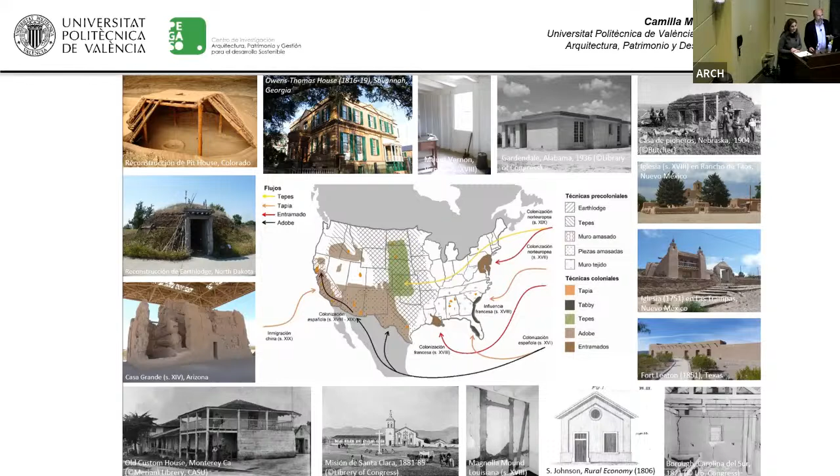But also we have been studying earthen architecture in the States. Some say, is there any earthen architecture in the States? Yes, there is, and there's a lot, with a big variety, so interesting and so rich. As you're curious looking at that, don't worry, we have two articles already written on earthen architecture, and we will share them with you about the techniques and the preservation work on earthen architecture in this country.

Earthen architecture is, that way, a local heritage, but it's also a global heritage because you can find it everywhere, literally. And it's a wealth of architecture with different techniques - the same material, but used in different shapes, different types of techniques, depending on the conditions, the weather, on many factors.

In fact, recently there has been an initiative to see the inventory of earthen architecture in the UNESCO World Heritage List - how many of these sites belong to the category of earthen architecture. It was discovered that 150 sites, let's say 20% of the UNESCO World Heritage sites of cultural or mixed sites, are made with earth. So let's go to the second chapter, earth and construction.

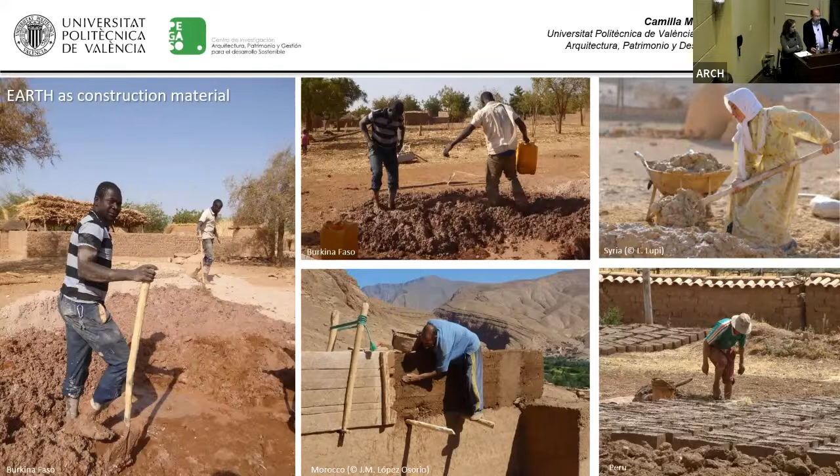Earth as a construction material is a wonderful material because it's shapeable. You can use it many ways. These are photos made last year.

So another thing to say about earthen architecture is that it is still alive in many places of the world. Even in the States, we have seen people working with adobe or with rammed earth. Still there.

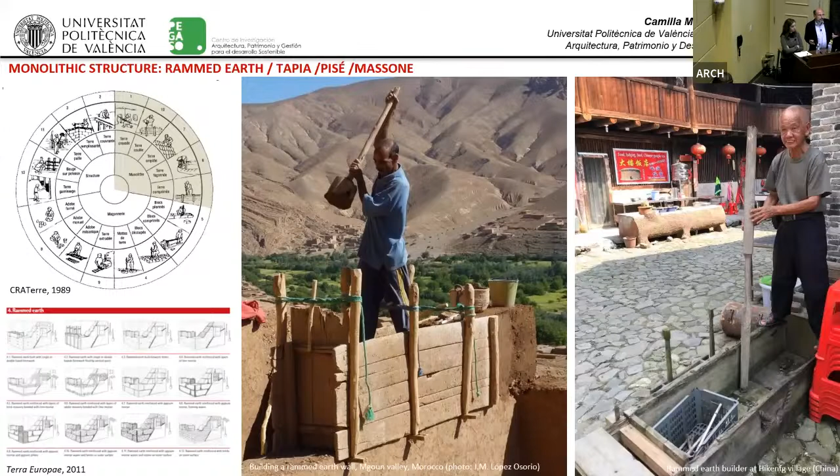If we speak about techniques, there are three big families. One would be the monolithic structure - that would be rammed earth, which we call in Spanish tapia, or pisé in French, or massone in Italy. You can see here two builders, one from Morocco, one from China, in a very similar way with a very similar formwork, because this is some kind of international heritage. This type of formwork goes back thousands of years and is still being used in some places.

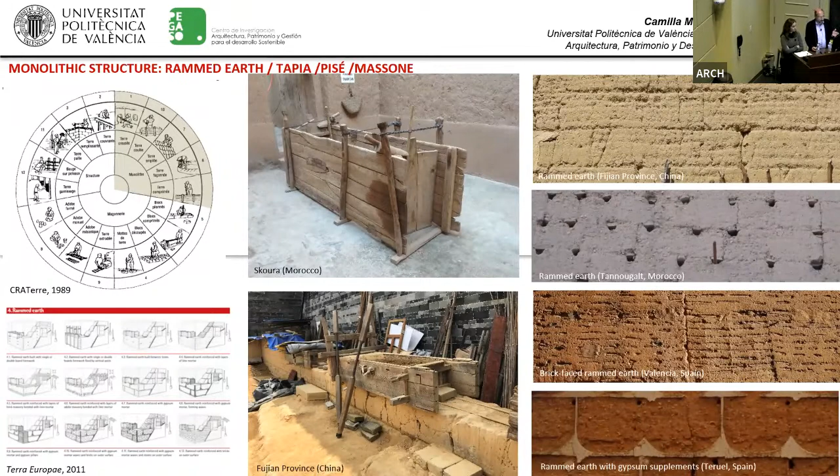You can see some variants with earth - only with earth, enriching with lime, or combined with bricks, with gypsum. There's another type of monolithic structure in this family: the cob, also called pared de mano, bauge, or terra e paglia, which we can find all over the world.

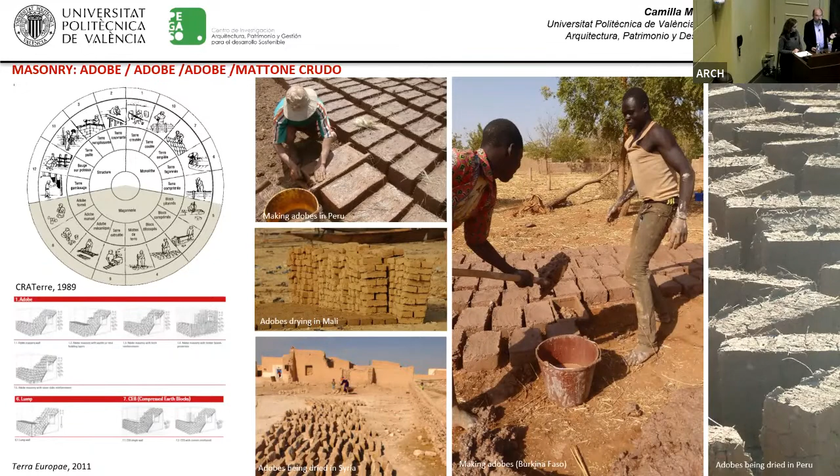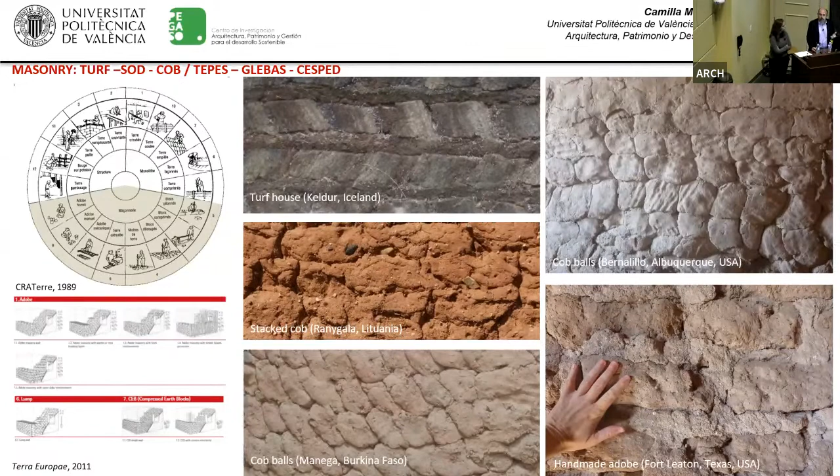Then the second family would be the earthen masonry. For example, the adobe would be the most famous or well-known, but also turf, or what you call here sod, or stacked cob balls, handmade adobe - many possibilities depending on the place and the possibilities.

And the third big family, the mixed structure, would be the mixture between vegetal plant or branches or wood, timber, with earth - so it would be like the wattle and daub type or the half-timber type.

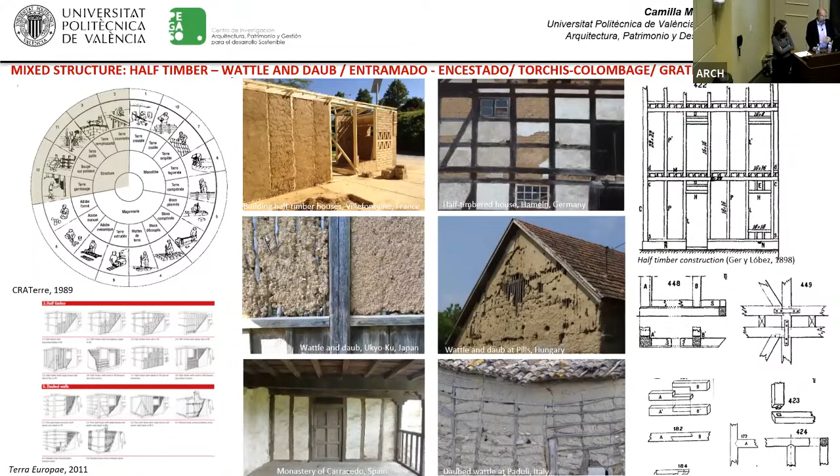So after seeing a little bit, I think we have to go further. Okay.

So after seeing what we are calling earthen architecture, now let's look at why it's important, or why it's still important, and which values we can still find in this type of architecture. If we go around the 3 pillars of sustainability - economic, environmental or natural environment, and social - we try to find which type of values we can find in earthen architecture related to these pillars.

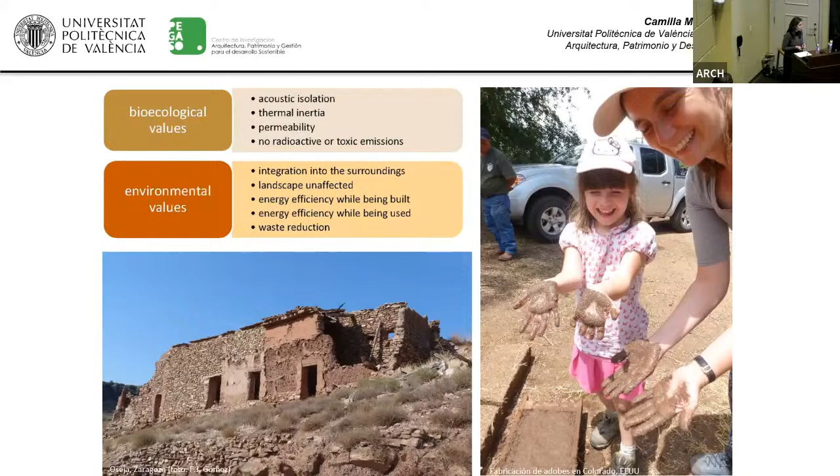From a social or sociocultural point of view, it's related to our culture, our place, our local history in many places and countries. It's a type of architecture that can really connect us with our culture, with our past, but also our present and future. It's something we can understand as an architecture that teaches us about sustainability, about our culture, about our history. From an intangible point of view, it's related to knowledge - the know-how.

It's related to craft people, people who know how to construct and build with these kinds of techniques. So if we still use this architecture, we really could contribute to the maintenance of this knowledge and these craft people. If we organize all the values we saw, we can arrange them around three pillars: sociocultural value, socioeconomic value, and environmental value.

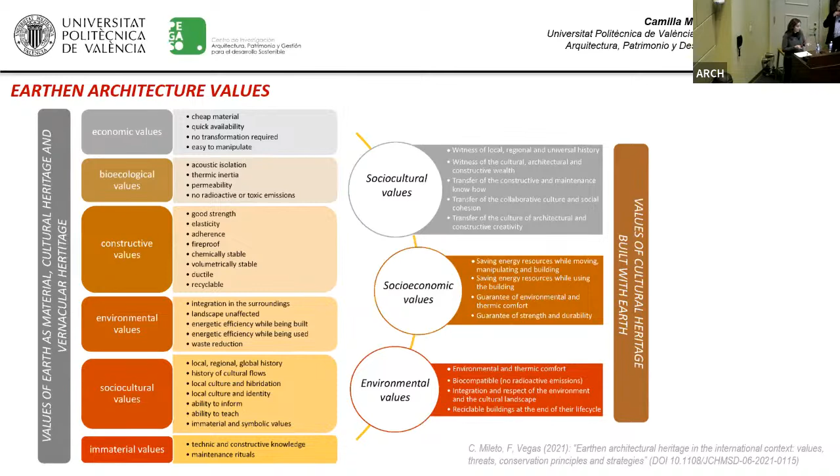So we can say it's still interesting in the world nowadays because we are trying to find sustainable architecture, and earthen architecture could give us an idea or a possibility to work on that. But of course, nobody is perfect - earthen architecture is at the same time weak in front of other things. For example, water, atmospheric agents, so all natural threats, as well as anthropic threats and social threats.

Earthen architecture is weak, we can say. It's weak in front of water, especially wind, and especially the combination of water, rainfall, and wind. So sometimes we have to restore it, to maintain it, and it needs maintenance that is not every 10 years. Maybe it needs maintenance every year, every 5 years. So we need to maintain this architecture.

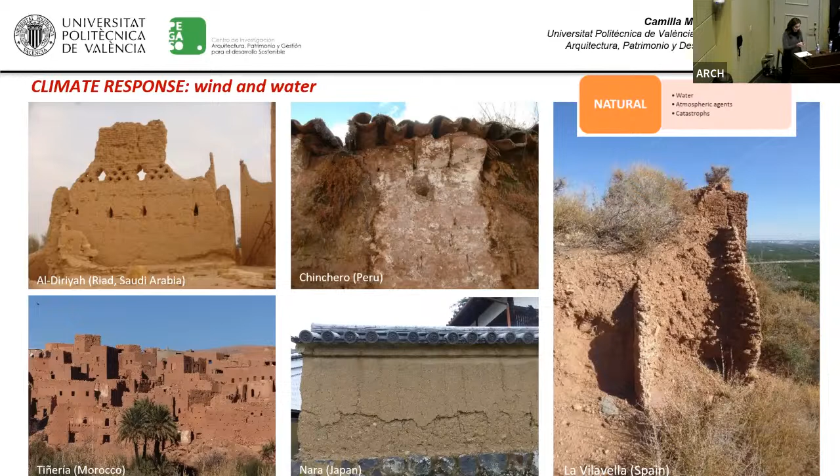During lunch we were speaking with some students about the weakness of earthen architecture in front of earthquakes. We saw in Morocco some time ago, about a month ago, it seemed that everything happened because the building was made with earth, but it's not. So it's weak, maybe, but it's not more weak than other architecture. The thing is that traditional architecture is something that remains from a long experience during history. So maybe what we have nowadays is the best that arrived to us. If we really look at this architecture, there are many devices to make it strong in front of earthquakes, for example, or other threats. So it's not everything because it's made of earth. This is not really the problem.

We can use it also in earthquake-prone areas, and it's possible to restore it, to recover it also in these places. Another point is floods and cyclones, especially floods. Of course, it's more or less a weak architecture in front of water. In the case of floods, the water remains for a time, so of course it's a problem for earthen architecture, but we can recover it, we can restore it, and we can organize with some devices in front of this type of situation.

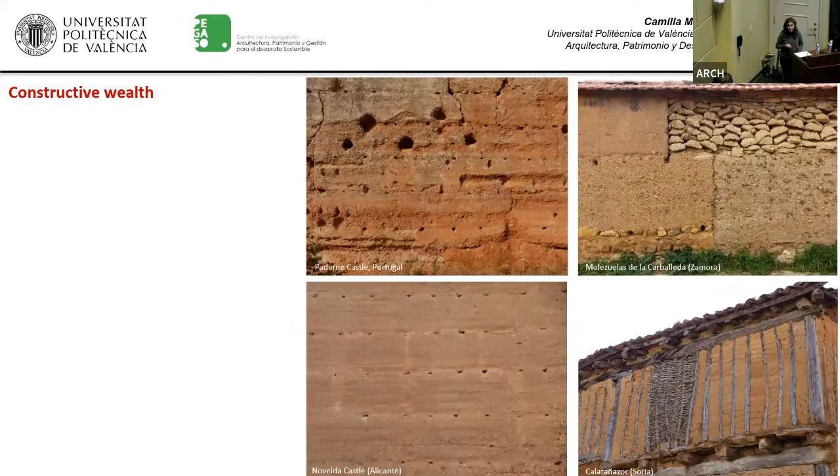We have a lot of different techniques. I don't know, we found like 70 or 80 different techniques that we can find around Spain, of course from the old period, from the Iberian period, so prehistoric times, through the Romans, through the Islamic period, till the 19th century.

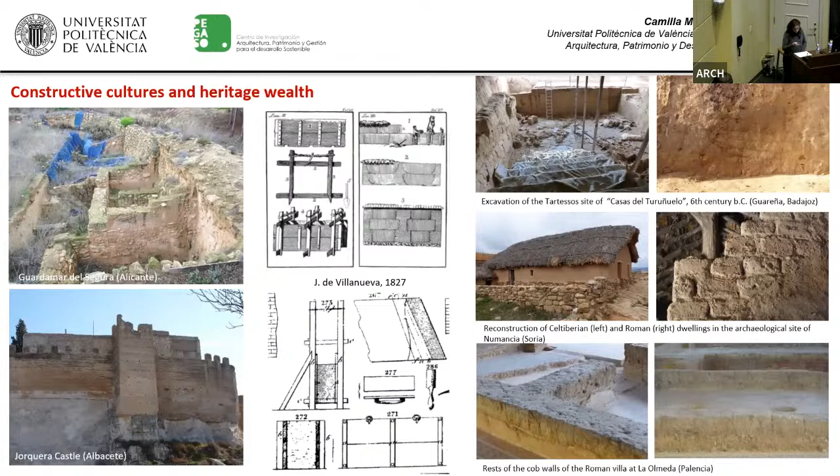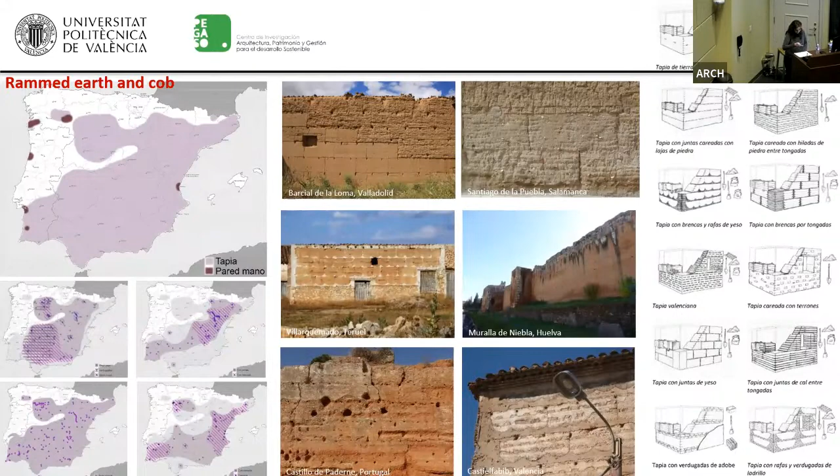And well, these are the maps of the distribution, for example, of rammed earth and cob, which is found in almost all the territory, really, except the north. And then adobe with many different solutions, and then half timber and wattle and daub. So we saw that we have monumental heritage and we have vernacular heritage.

We have to speak about the state of conservation of one and the other. In the case of monumental heritage, we have a lot of big fortresses, towers, and so on. They are all national monuments, so they receive money for maintenance and conservation. It's not the case of vernacular heritage, which in many cases is private.

There's no good appreciation of this architecture, because the people that own it don't recognize its value, so they don't put any money into maintaining these buildings. Of course, we have castles and churches in bad state too, not only vernacular architecture, but it's possible to find money for those buildings.

This is the situation of vernacular architecture: many villages completely built with rammed earth or adobe, and you can see any type of intervention with cement, renderings, and so on. If you follow the rubbish bins in the villages, you always find earthen architecture, always. That's the image of how much we value this architecture. There are other places where in front of earthen architecture you find a Ferrari.

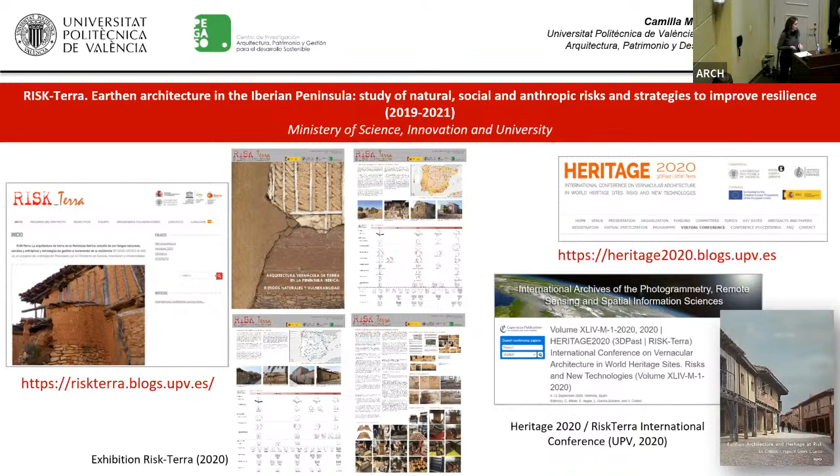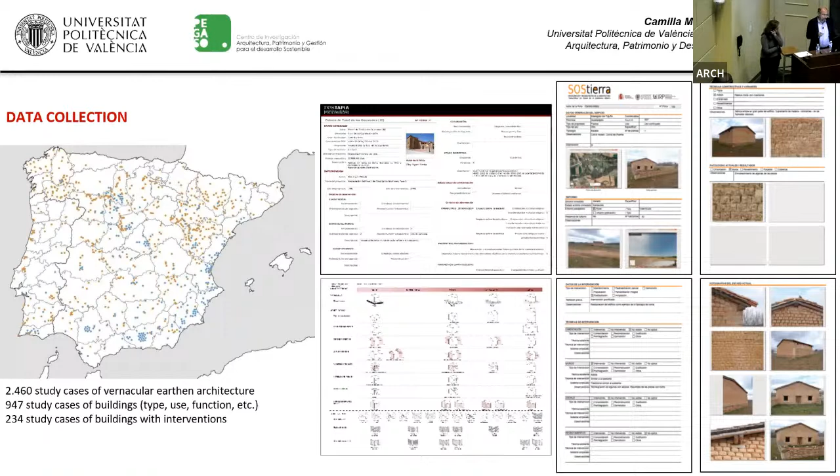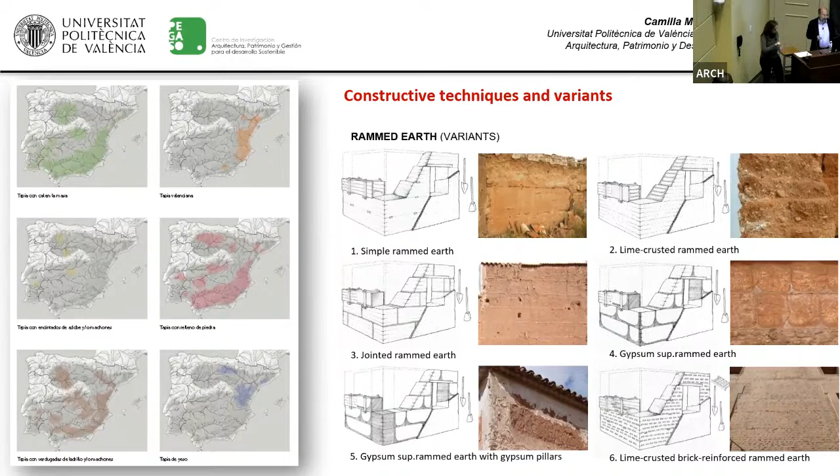We made a data collection of cases of vernacular architecture all across Spain. This map isn't updated; there are many more points than you can see. We were studying the constructive techniques and variants around Spain, and the influence of geographical factors, like where there's so much rain, so much heat, so much timber, and which technique is used accordingly.

We were looking at climatic and social factors, and we studied the weaknesses, threats, and risks. We classified them into three big families: natural ones like water, atmospheric agents, or catastrophes; anthropic ones like transformation and the use of inadequate materials; and social ones, as Camilla was speaking about—abandonment, social discredit, loss of know-how, demographic pressure, etc.

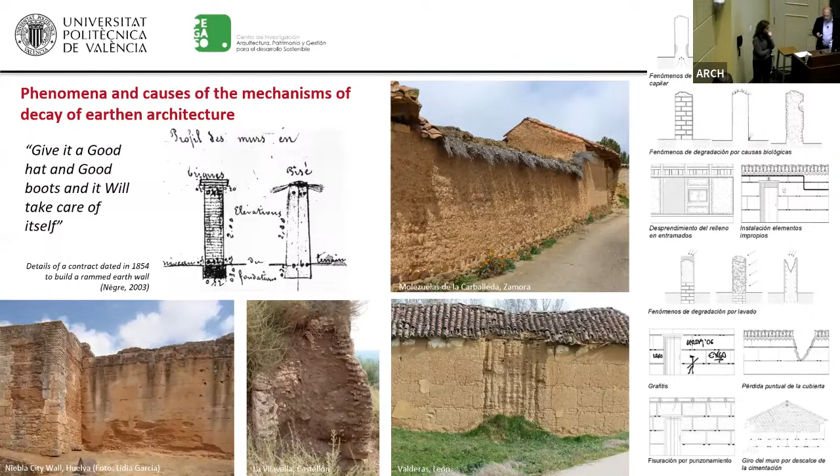There's an interesting proverb found in all cultures and languages: 'Give a good hat and a good boots, and it will take care of itself.' As long as the rammed earth or earthen wall has boots—something that separates it from the earth and humidity—and a hat, something to protect it, it will last. If not, all these types of problems begin.

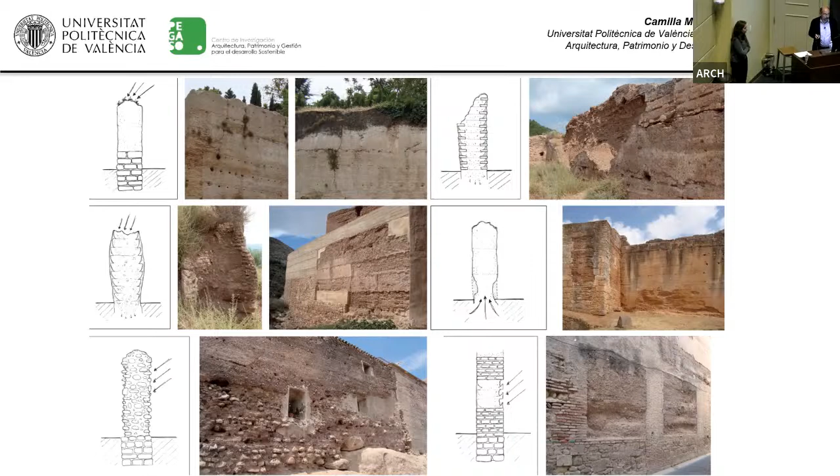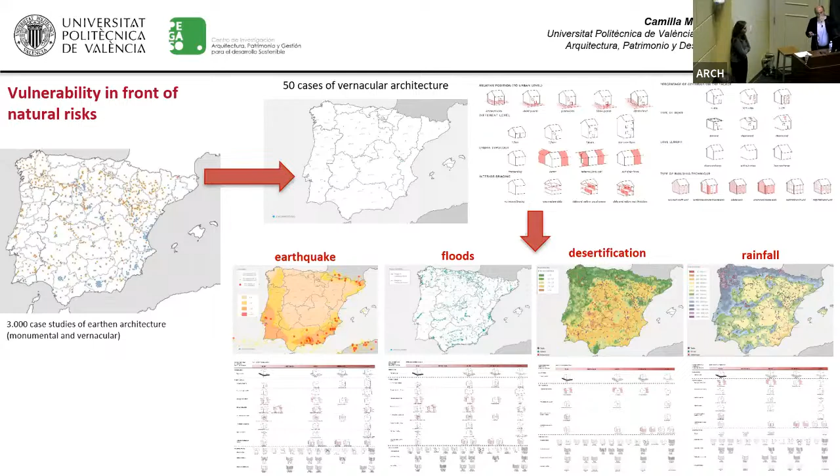We studied the types of problems and degradation found in these walls, and tried, in a scientific way, to measure the vulnerability against natural risk. We took about 50 cases of vernacular architecture and studied vulnerability against earthquakes, floods, desertification, or rainfall—studying house type, height, situation, the possibility of adjacent houses, whether sunk into the earth or very tall, etc. We applied the Delphi method to assign scientific values to this vulnerability.

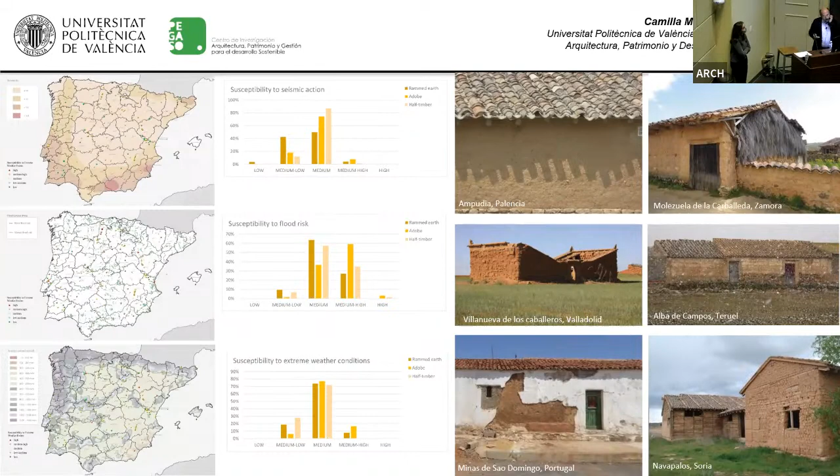In the end, we assessed all these types of houses on a 1 to 5 degree scale of vulnerability, and then applied that to 258 cases of vernacular architecture. These are some of the results—this could be a whole lecture itself, but just to mention that we studied that, and we made laboratory analyses, like aging and weathering tests.

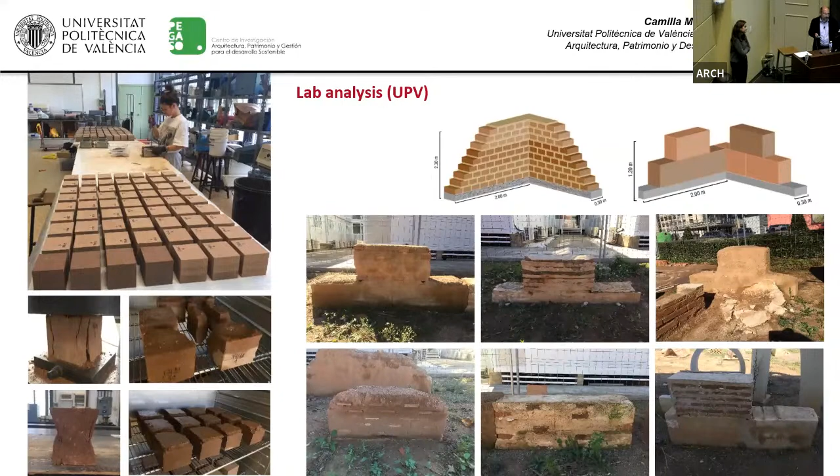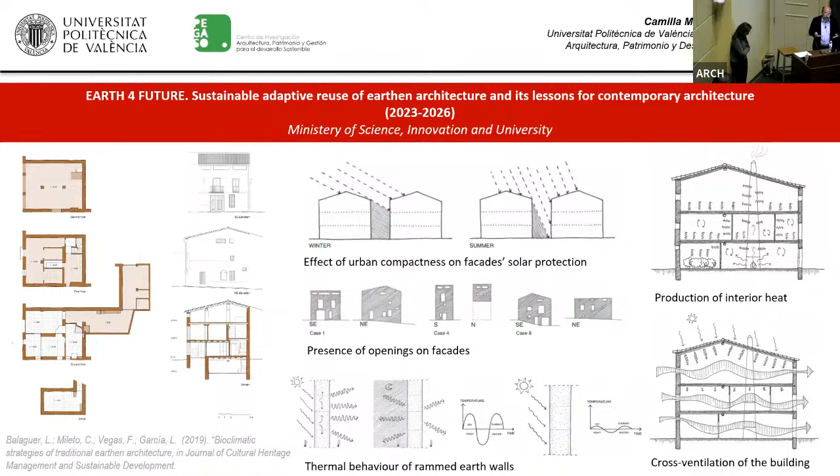And we also studied the social impact factors, and we tried to organize a degree of social vulnerability. And now we are in the 4th project, called Sustainable Adaptive Reuse of Earthen Architecture and its Lessons for Contemporary Architecture, from the point of view of carbon footprint and also bioclimatic behavior, etc.

So let's go to the 5th chapter, the protection, conservation, and restoration. We have to distinguish if we are speaking about monumental architecture or vernacular architecture, because monumental architecture is normally listed, while vernacular architecture is not. One is protected when the other is not, or valued and not valued.

One has a project, an intervention project for historic preservation. The other sometimes has a project, but many times it's just without one. So sometimes monumental architecture has some intervention criteria or public funds, while vernacular architecture is normally linked to functional needs and is privately funded.

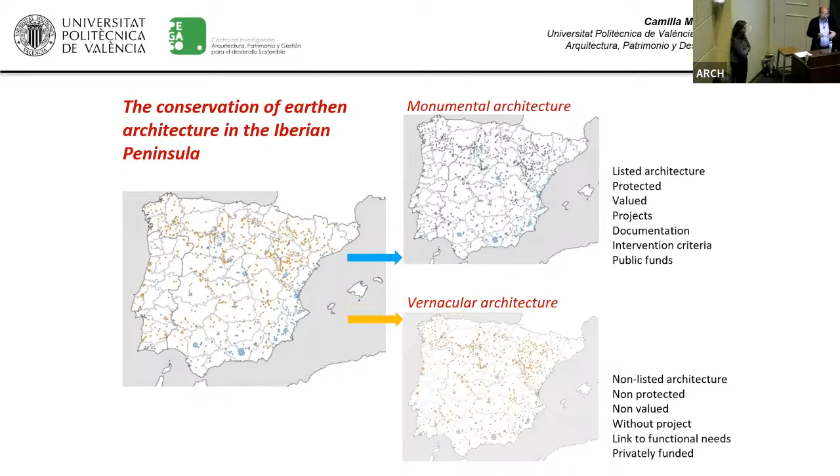So we were studying the evolution of the type of intervention in monumental architecture, and the techniques used and how they worked. Because it's good to know what happened. Frankly, not to point and say you're guilty of that, but just to see: did what you made work? Let's learn everybody from that and apply it.

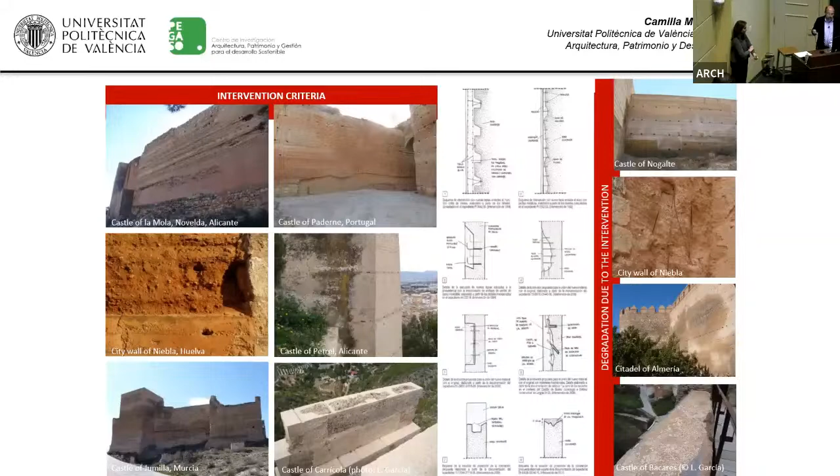So we saw that the type of technique or intervention depended on the moment in time - the 80s or the 90s or whatever. And of course, the more compatible ones were the more successful ones.

With vernacular architecture it happens much more like this, much the same, because the problem is that with vernacular architecture it is much harder to find or trace the project, or to trace what has been done, etc.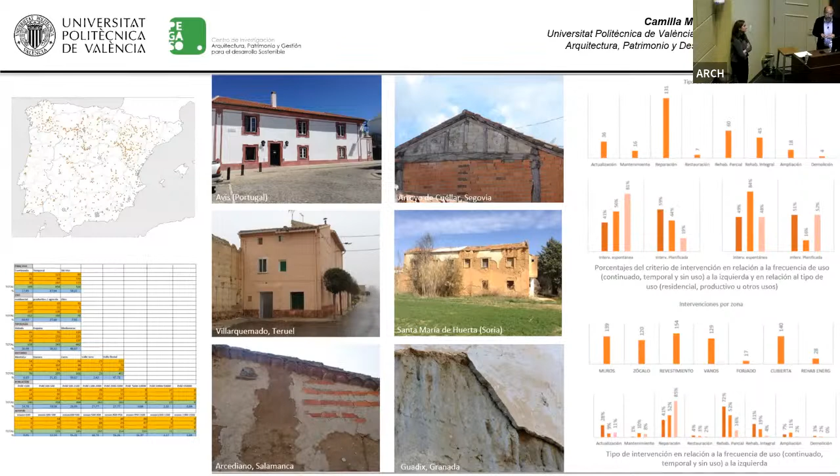Because there are many types of intervention in vernacular architecture, like the little repair - an isolated repair here and there - or maintenance as a continuous task of helping the building to continue, to updating, normally linked to aesthetic updating, or partial rehabilitation or adaptive reuse, or a global adaptive reuse - sometimes very hard to swallow.

Sometimes enlargement done with other materials normally, or even demolition because of discredit or whatever, because of the thinking that new architecture would be better, or very, very few cases of restoration or historic preservation. That's the truth.

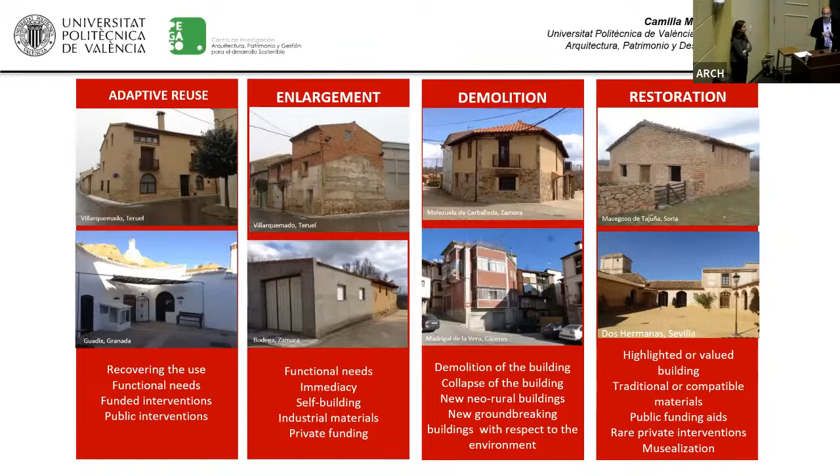So we have things like functional obsolescence, population migration, social discredit, lack of valorization, which lead to abandonment, degradation, loss.

This is the mechanism, and it is an architecture we can say is without architects. But the conservation or the intervention is made also without architects, for good and for bad. Normally for bad.

And one of the main reasons is that they cannot find the materials anymore, or they cannot find the know-how to build as the ancestors did, so they just apply cement, or bricks, or whatever they find in that moment, in that situation.

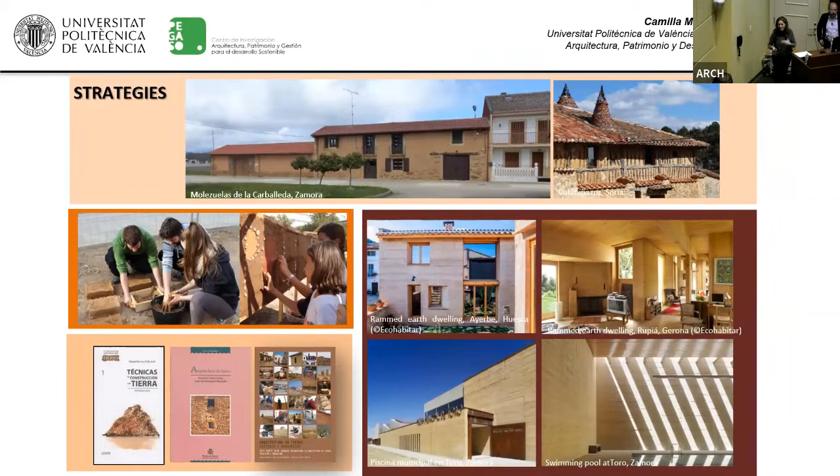So, what we can do is either face a desperate situation, or we have the opportunity to do something. So we go around to try to collect the best practices we could find around Spain. There are a lot of initiatives, private, public, and so on. And with these best practices, we organized 6 strategies that we can maybe use to preserve this architecture.

First of all, the knowledge. Of course, preservation always starts with knowledge. If we don't know what we have in front of us, we cannot preserve it. So the first stage is knowledge.

The second one is valorization - how we can help people value this architecture that, at the end, is their own architecture, not mine. So how can we help them value it.

Then protection, that is something necessary. We need to list the building. If the building is not listed, maybe we find rubbish in front of us. So we need to list the building.

Then conservation. Conservation is something that needs expertise. Not everybody can conserve or preserve this building. So we need people with expertise and knowledge to do it.

And at this point we need the 5th strategy, which is training. We need to train people at all stages, from the administration, the architects, technicians, conservationists, and so on, and the bricklayers, the enterprises. We need to train them.

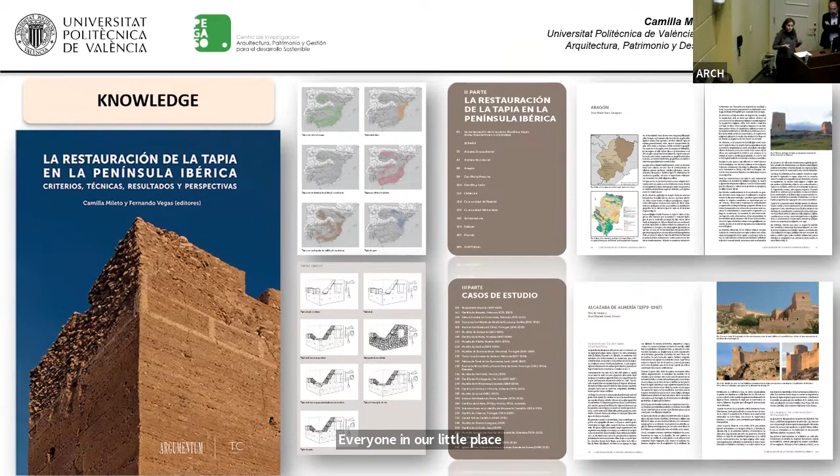Very quickly, some examples. We need all together to study and research about this architecture. Everyone in our little place maybe, but we need to understand more about it. Education from the beginning is very important to fight against the discredit of this architecture, to help children and young people touch it, understand how to build with them, and understand that it's creative and interesting. We can still work with that.

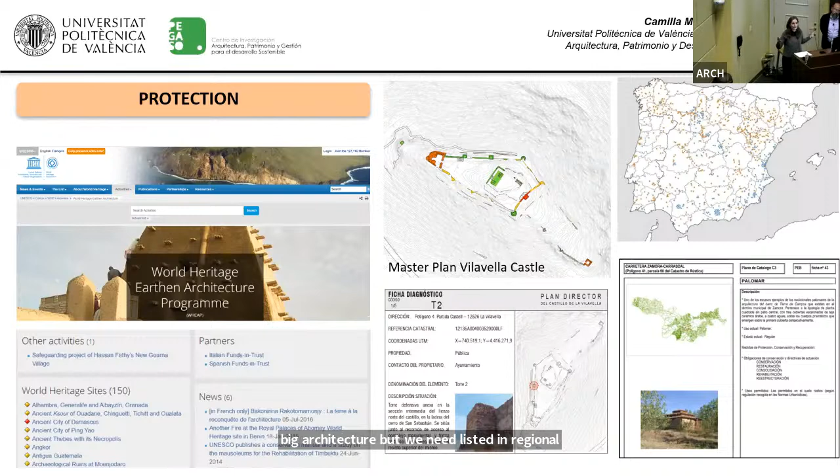Protection, so the idea is not only the World Heritage, big monuments or big architecture, but we need to list regional and local places too, which may not be so impressive architecturally, but we need to preserve them. Then conservation—we will speak more about it—we need to conserve and restore monumental and vernacular architecture.

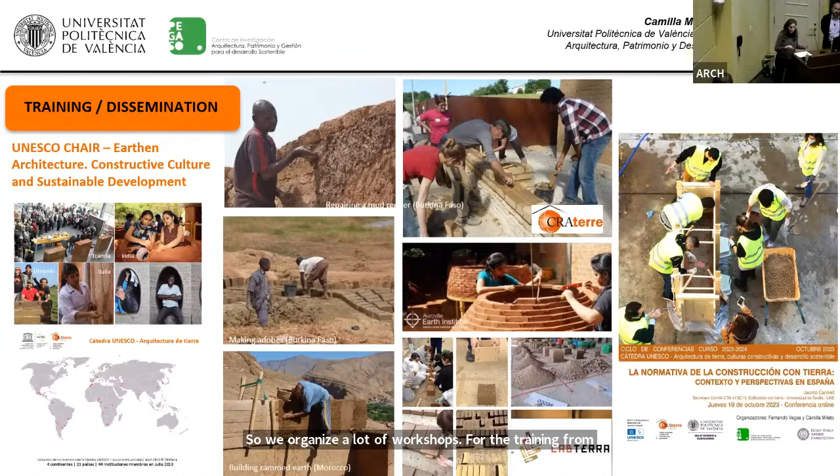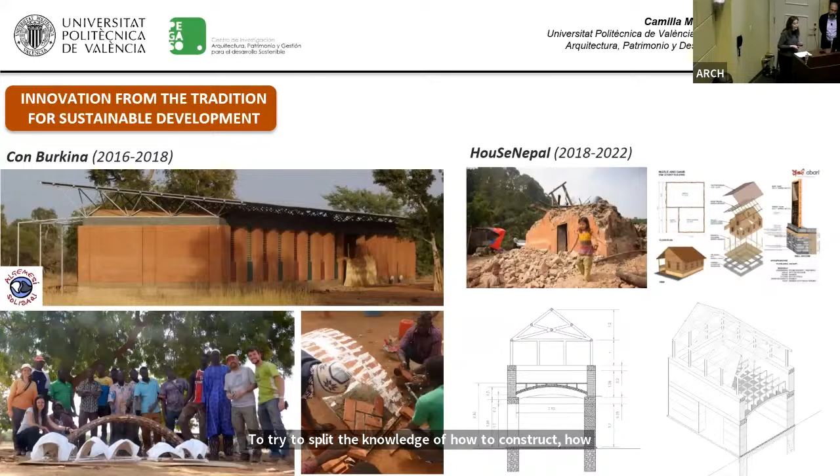Then training: we organize a lot of workshops, from bricklayers to students and the general public. Training or dissemination also includes manuals—we have done many manuals on different techniques to spread the knowledge of how to construct, build, and restore this architecture. And then the innovation from tradition, which we will explain more about.

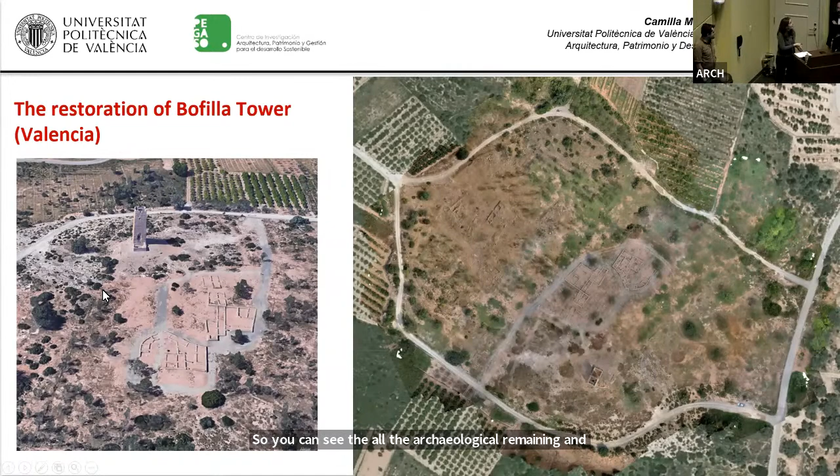This is the tower before the conservation work.

It was a rammed earth construction, and you can see the construction here—it was 21 layers of rammed earth. It was a really big structure. It had lost all the interior floors and the stairs, so it was completely void.

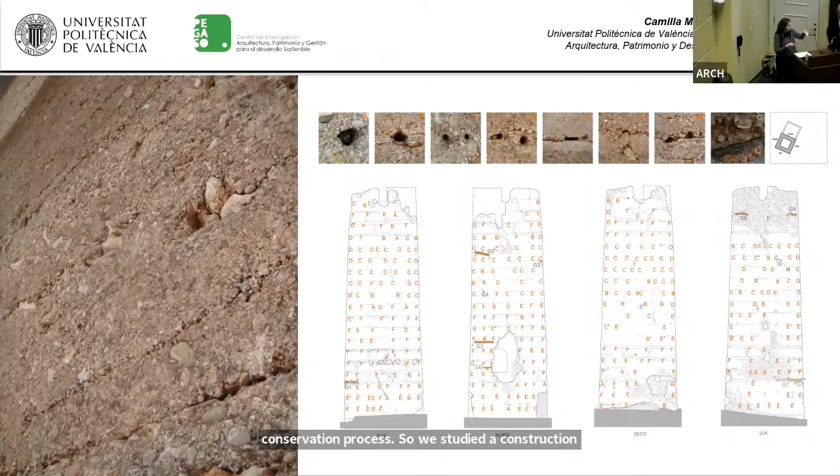We studied a lot before starting the conservation process—the construction system, the formwork, all the traces of construction—to try to understand how they built it. This is the idea of how they built it with this formwork.

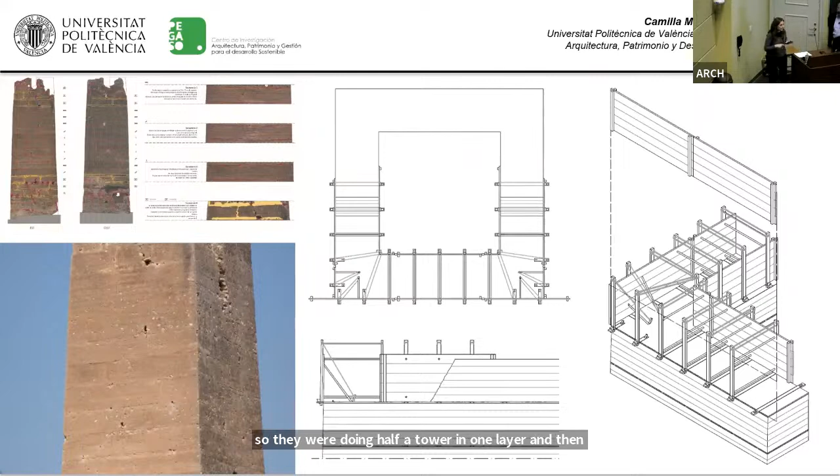There was continuous formwork—not the typical rammed earth module. In this case it was continuous formwork to build half of the tower per layer, then turn the formwork and build the other half of the tower.

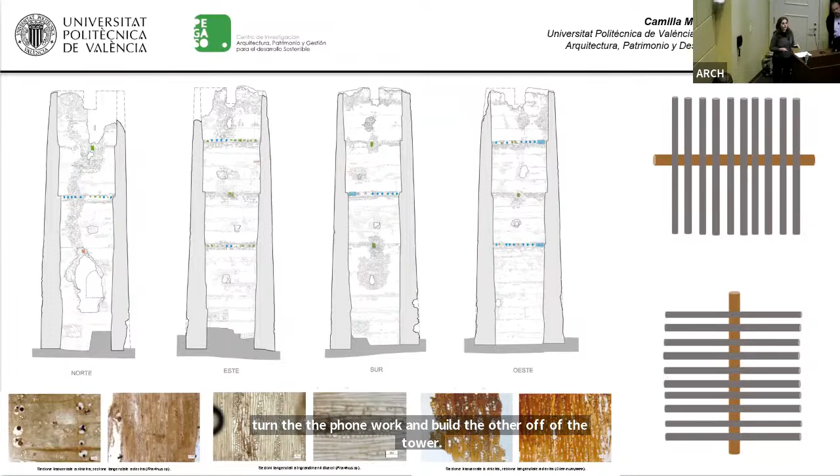We found all the traces of the floors, so we could understand how the interior was built. It had a double-direction floor with a principal beam and then little beams.

This is the restoration process very quickly: we cleaned it, made all the joints, and then filled some gaps that we had—not with rammed earth in this case, because the gaps were in a horizontal direction rather than vertical, so it's very difficult to ram in that way.

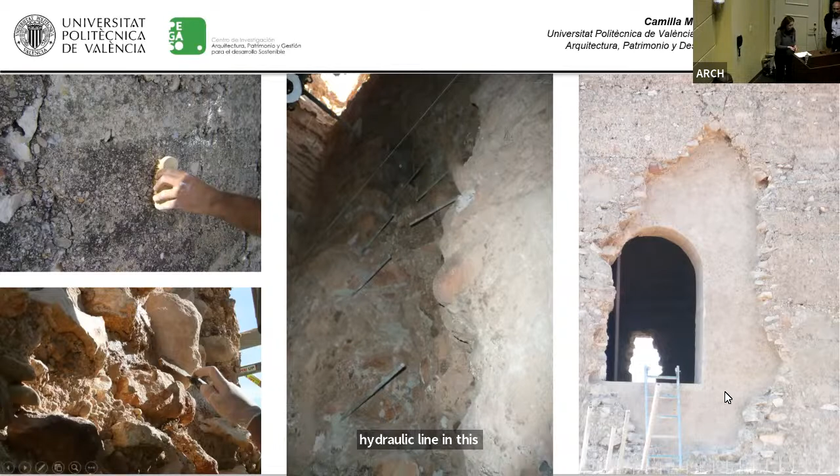So in this case we used masonry with lime, hydraulic lime. You can see here, for example, this was a gap that we filled in the tower.

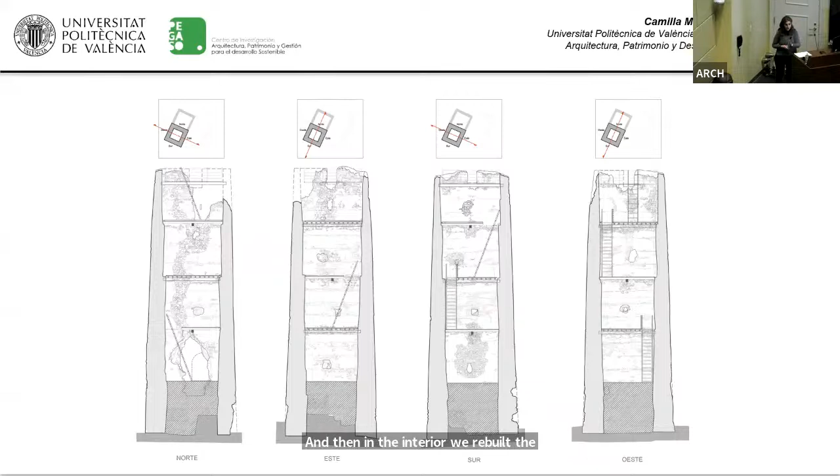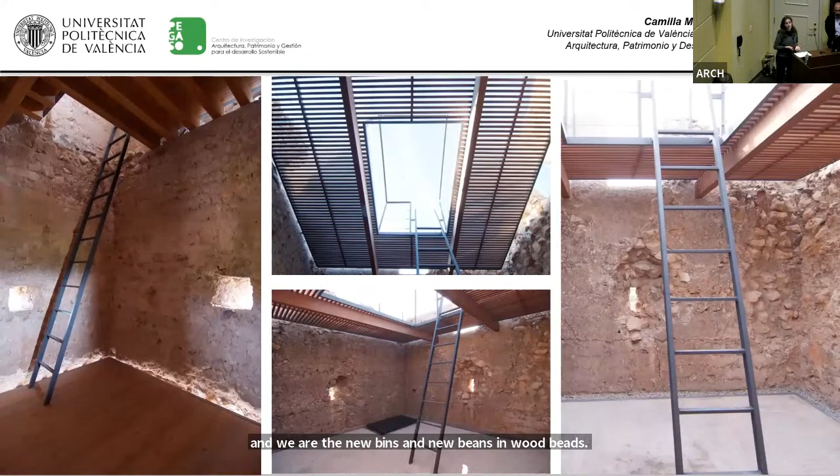This is the tower at the end from the exterior, with all the gaps filled and the conservation work done. In the interior, we rebuilt the floors and stairs exactly where they were, but with new floors, new wooden beams, and stairs with a metallic structure. You can see the interior, and this is the tower finished.

No, it has finished. Second case.

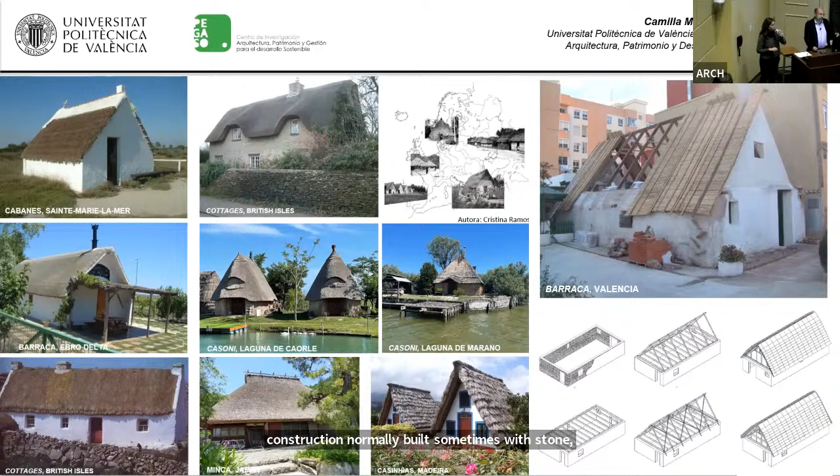It's very common to find this type of construction, normally built sometimes with stone walls, but many times with earthen walls, and then with these reed and thatch houses. So this is a typical view that you can see in Valencia, and you can see, for example, the walls, the adobe walls.

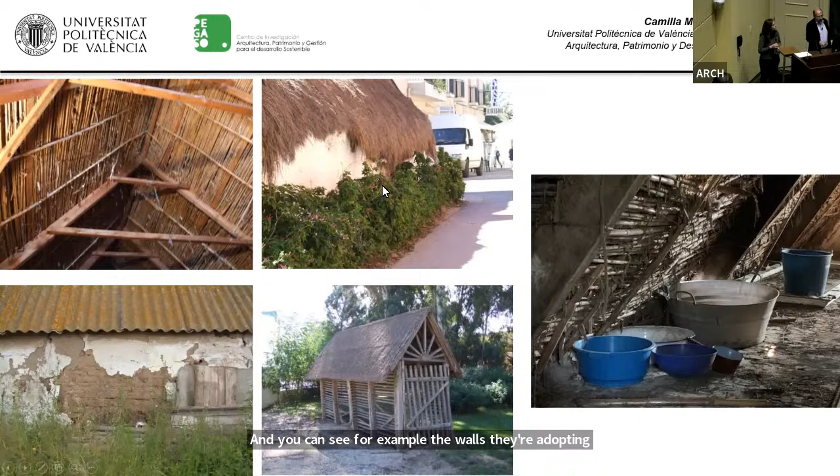We were speaking with the students. They usually planted some geranium here because the geranium are thirstier of water than the adobe. So whenever it rains, the geranium takes all the water. So it is a way of maintenance. It's not decorative, it's just because it has some reason.

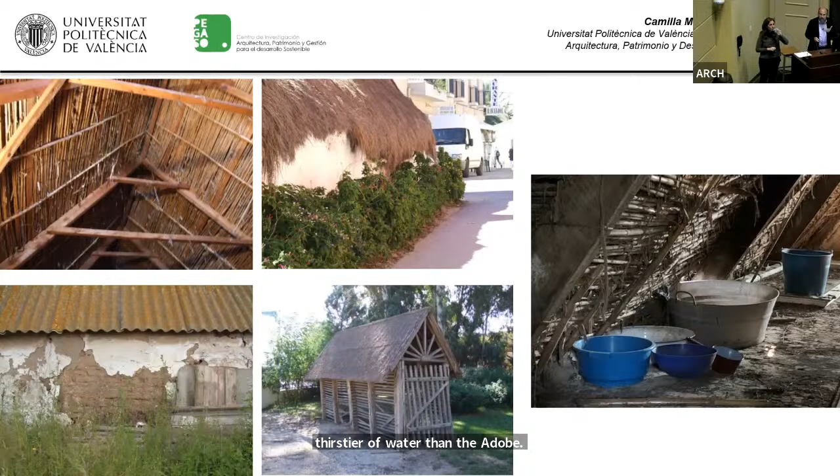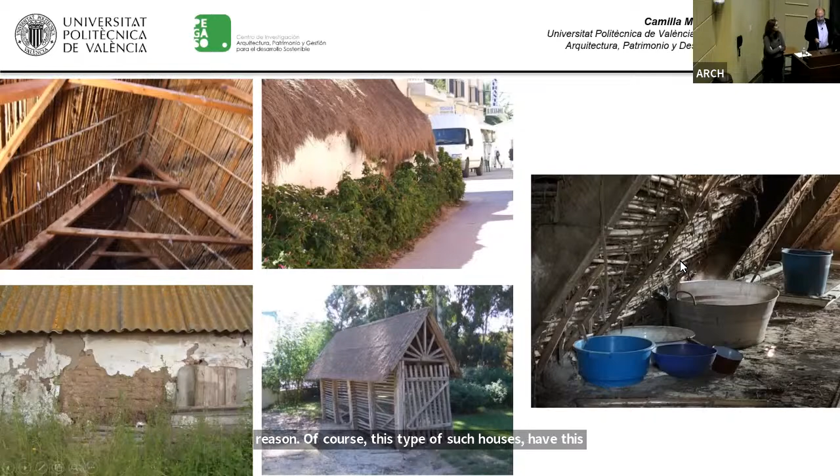Of course, these type of thatch houses have this problem when the infiltration comes, and then you have to repair it, you have to make a maintenance. If not, it will go down quickly.

In fact, we received this commission from a private entrepreneur. This is in 2018 when we began working, and you can see while we were making the project, especially when we were waiting for the permission of the city hall, it was going down and opening, and it was really dangerous. It was like finishing.

Even you can see here, it's amazing how the walls were leaning outwards because the inner ties were broken. Were not broken, were eaten up by termites. They were all full of termites. So they ate the ties, and the ties just didn't work anymore as tension ties.

So the walls were under pressure, and the collar ties there, the collar ties work in compression. They began to work as tension also, and they were pushing, and it was about to fall. Okay, so we arrived just in time.

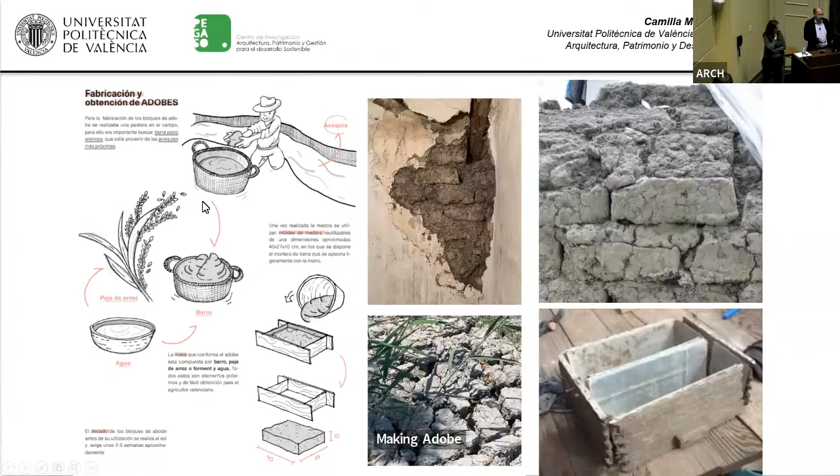So we made adobe. We were making adobe in molds the traditional way, just using earth and straw, and then we put another wall on the sides just to compensate this leaning, and we connect these two walls of adobe with reed.

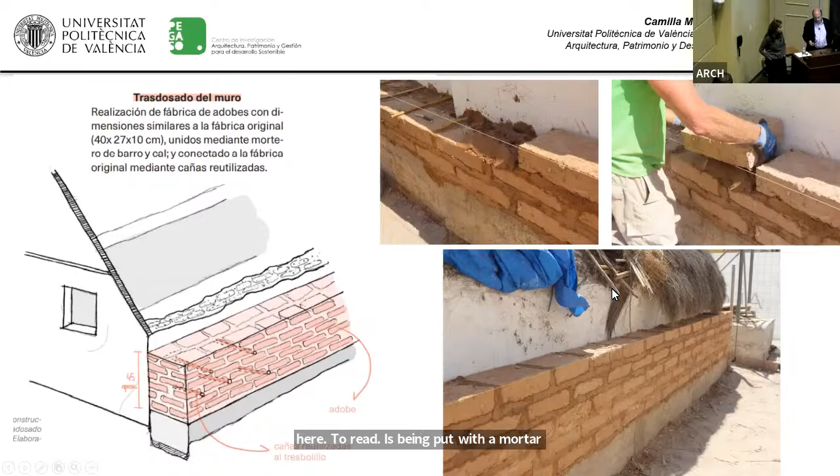So the reed was connecting one and the other. You can see here the reed. The adobe is being put with a mortar, mortar with a little earth, mortar with a little lime.

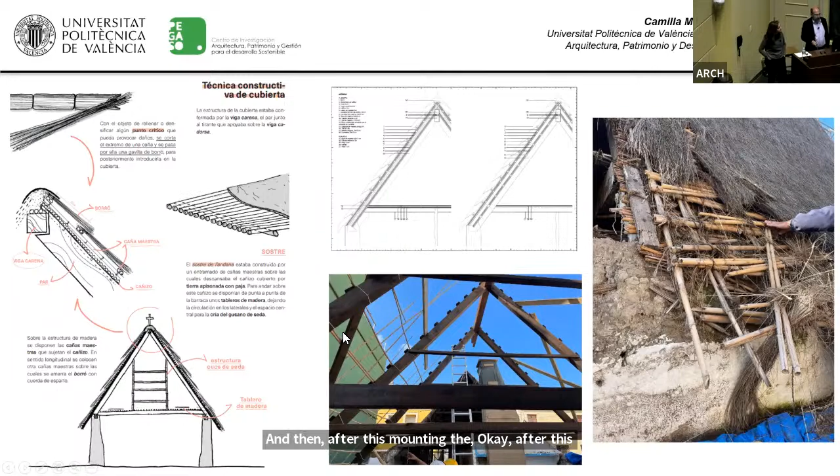And then after dismounting the structure, so we were working back, mounting the new structure. I mean, now it has a double layer.

That means it has the reed inside, but also has some isolation layer, even some fireproof layer, and then the outside reed, the outside thatching. So it's difficult to explain quickly, but if there's a fire inside, the fire won't go outside, and if there's a fire outside, it won't come inside. And that's because there's a big layer of natural cork and some natural gypsum layers, etc.

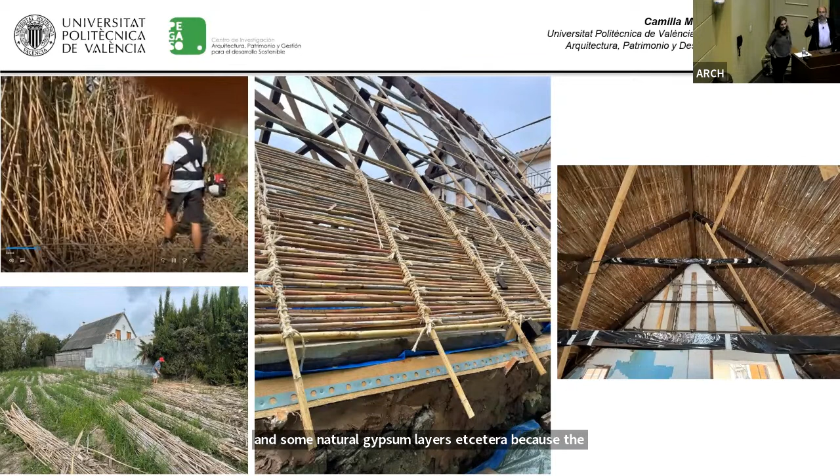Because this thatch hut is going to be a restaurant, so that's like fighting against everything, against all the codes, especially in a very rigid system like we have in Spain.

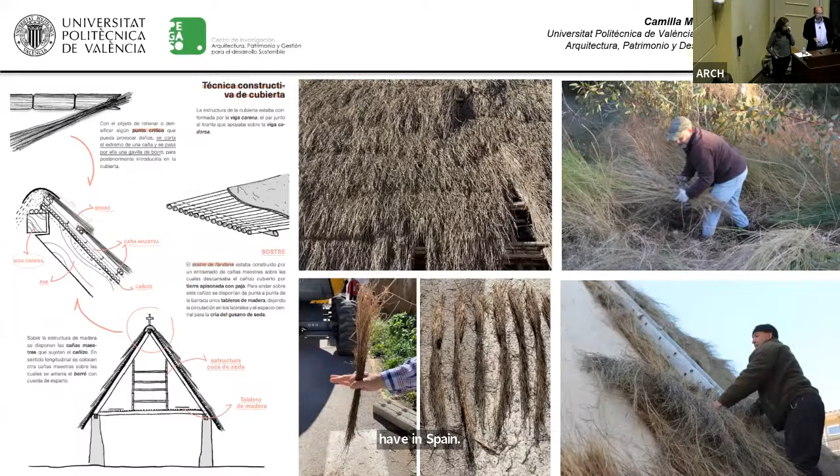Okay, so this is the way we were collecting the thatch, and then this is the house. This is the thatch hut when it was finished with a burnished lime and earth layer here, and this is the kitchen, and all the structure back, and well, you can see by yourself.

And we were working with a local know-how, local trades, and so on. It was quite fun. It was not so easy because the enterprise maybe was not used to work on that type of buildings, but we made it.

And the third and final case is this house in a village, surrounded by gray houses, not because... because they were all Portland cemented. So in this village, everybody was very proud of having Portland cement on the facade. And we had this house, the only one still with gypsum render.

So the state was a very difficult state. It was about to fall, okay. And this house is built—let's see here—it has gypsum pillars, it has masonry, stone masonry, and it has rammed earth walls, and the party walls are rammed earth. Okay, let's have a quick look.

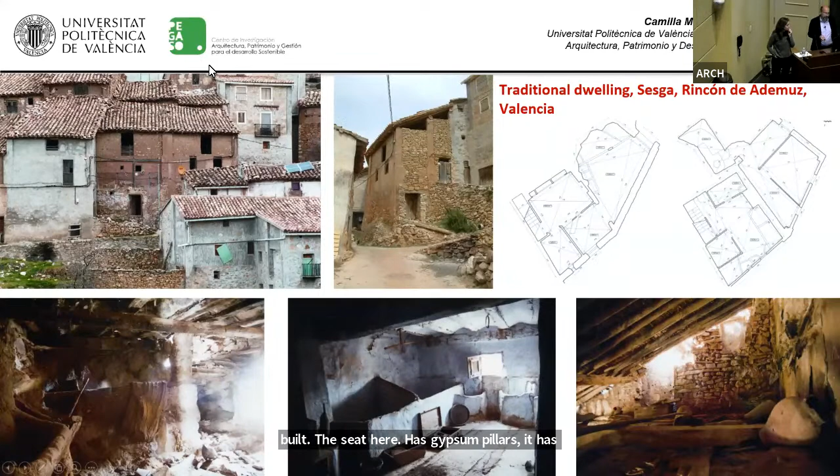So first of all, we were restoring the roof, then we were restoring the walls. You can see here the rammed earth, consolidating with lime, and putting some reed also as connectors to put back some earth when it was washed up, and then recovered.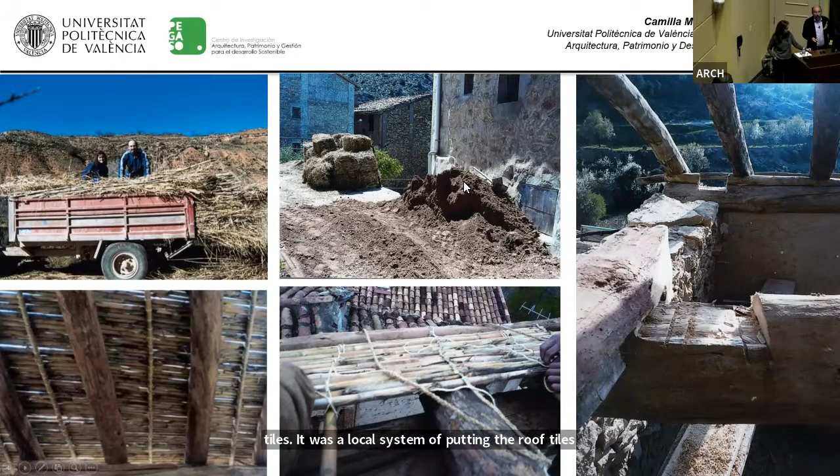And then we also use earth and straw to put the roof tiles. It was a local system of putting the roof tiles, because it is a very adherent mortar and it allows the tile to heat and to expand and to move.

Okay, this is the restoration of the floors made with gypsum and gypsum vaulting between joists, and we made it with these natural, local systems with reed and gypsum, or with hemp string and gypsum. So reinterpreting the local systems.

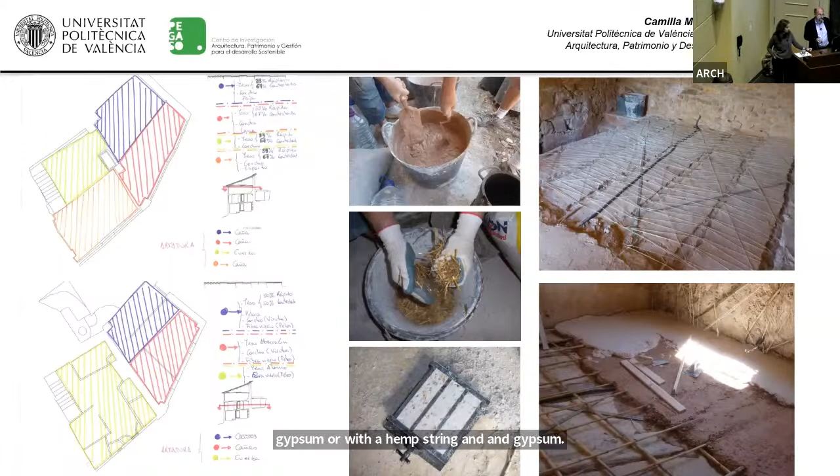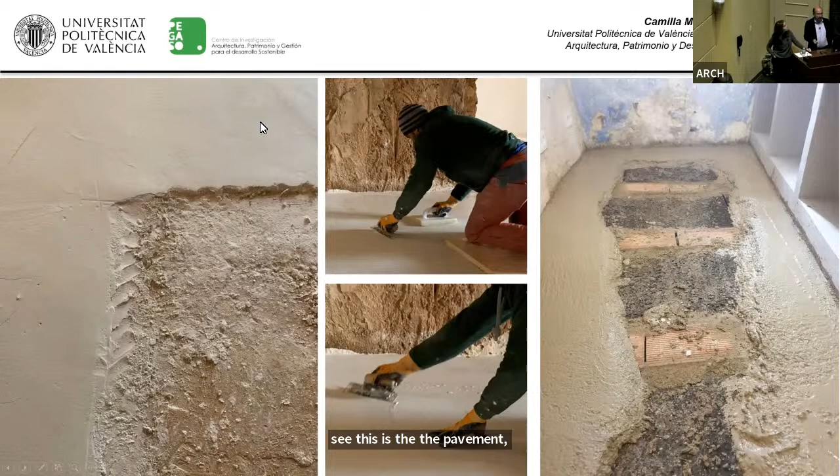And these are the pavements on the right. Here you can see this is the pavement with an underlayer with cork, the pavement with a lime layer, and upstairs a gypsum layer. This is a gypsum pavement. It is polished and then oiled.

And this is the result. I mean, now it's a very comfortable house, and it's very easy to maintain, very isolated because of raw earth and gypsum. It's so warm.

This is the house from outside. And what's important here is that we measured the life cycle analysis of this restoration, and we compared it with other life cycle analyses of other buildings.

We made three cases. The first case was preserving or updating the house with natural materials and techniques. The second option was to update a house with normal industrial materials. And the third option was to demolish the house and make a new one. We have plenty of examples of this in the village.

We realized that using the first option, with natural materials, we achieve up to 80% of carbon savings. It's amazing. It's even 50% better than updating with industrial materials.

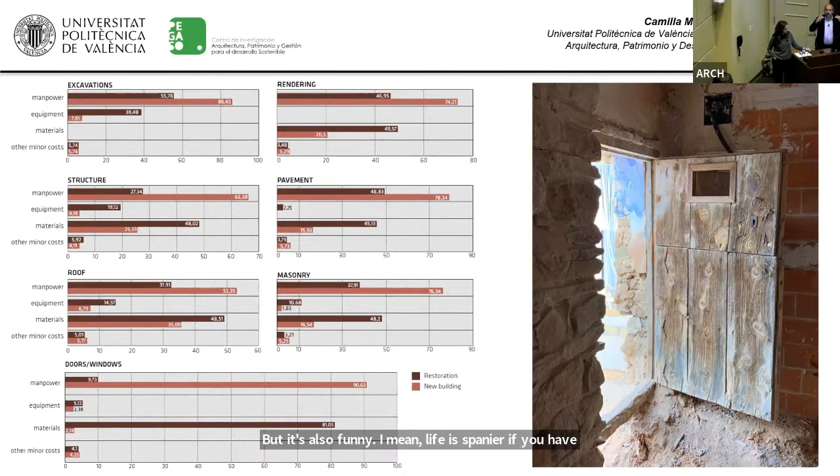Anyway, even if we accept that it's the same price to update or to demolish and make new, let's see what happens inside the price, because there are some surprises. For example, the doors and windows: all prices are divided into manpower, equipment, and materials. This is the structure of a price.

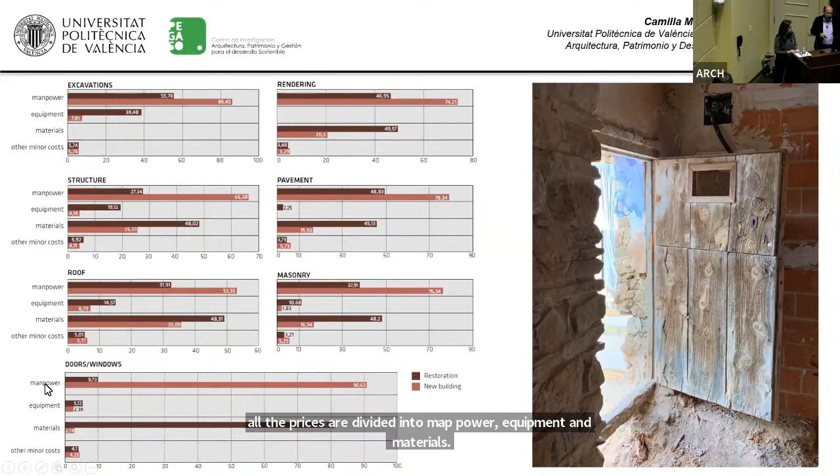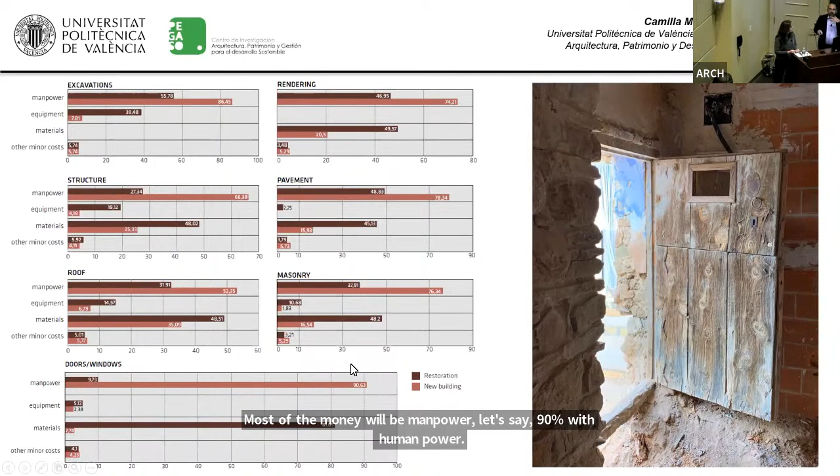If we restore it, most of the money will go to manpower, let's say 90%. So if it costs $1,000 to restore a door, $900 will go to the carpenter, to the local trade, and you will help him. Only 10% will go to equipment and materials, like some timber for repairs.

But if we buy a new door, most of the money will be materials. So what happens? The money will remain on the planet, okay, we won't go to Mars, but we're probably going to buy a door produced in New York or somewhere else. We're investing the same money, but the money goes elsewhere.

That's important. If you are conscious and aware of what's happening with the money, then it's very good to preserve, to update, and to use local trades.

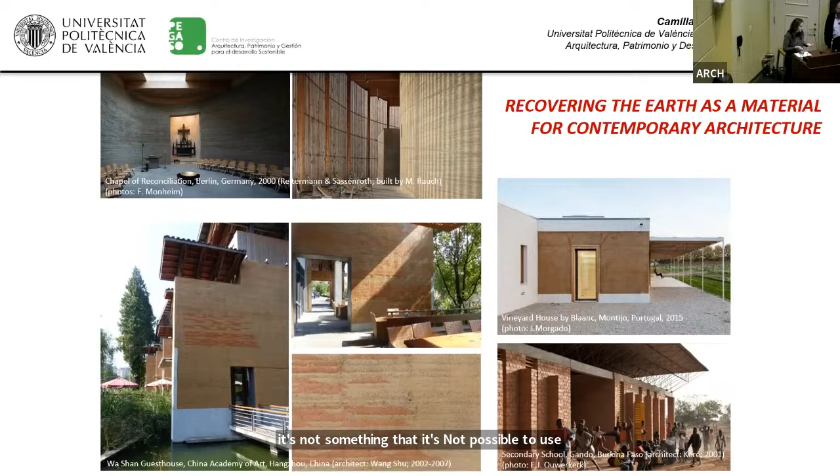We show you very quickly two projects where we had the chance to work. The first was in Burkina Faso, a collaboration with an NGO there, where they needed to build a secondary school in a village where there was only a primary school. The nearest secondary school was 30 kilometers away, so very few children could study there. They needed to build a new secondary school.

The primary schools there were all built like this — what they call the French school, or French style, built by French people with cement and a metal roof. This is horrible during the rainfall season because the sound is too much to stay inside, and it's horrible all year round because the temperature reaches very high, like an oven.

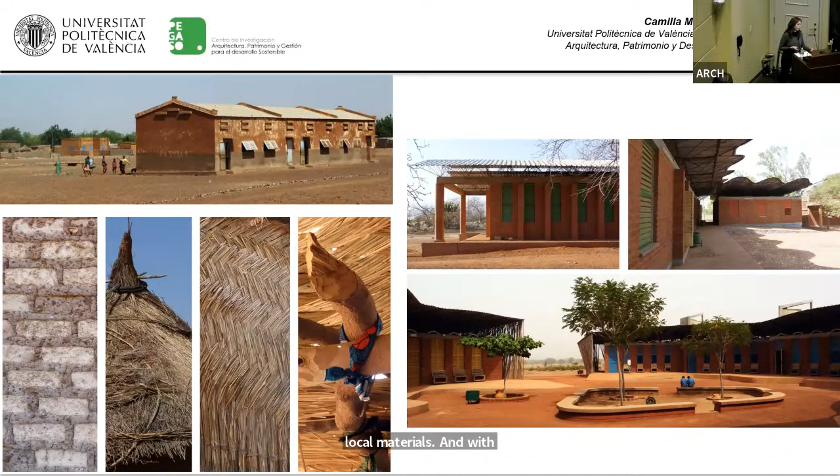So it's horrible all around the year. The idea was to try to find a way to build with local materials and with innovation in the type of building, of course. We collaborated with these people you can see here, a group of volunteers, to build this building.

This is the new building that is built with CEB — local compressed earth blocks — with walls and vaults.

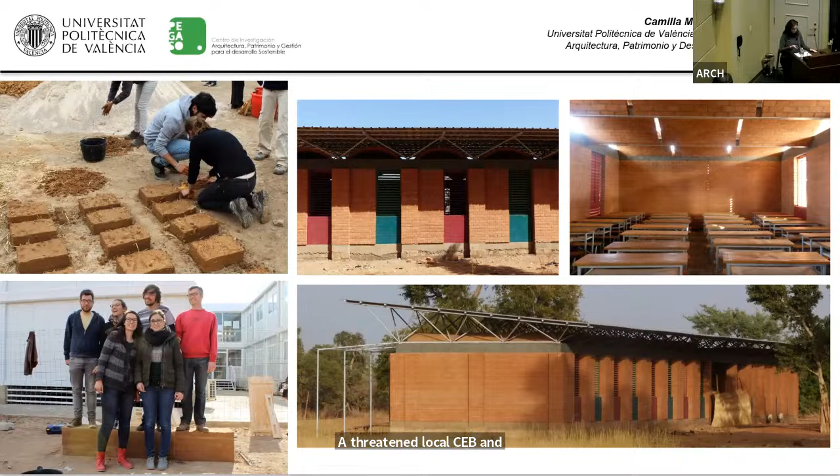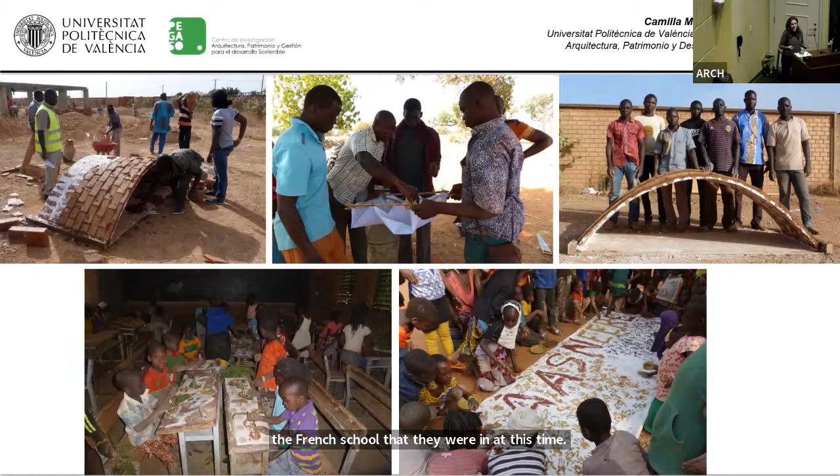What we did: we tried with the materials, we tried to build the CEB with the earth, local earth, with very simple machines, to help the people there learn how to construct the building. Then we made a workshop with local people, with the workers who had to build the building. We also worked with the children who were the future users of the building, to try to explain why this was a better way to build than the French school they were in at that time. So it was like a participation project, to try to explain to the community that this was a better way to build.

The other project was in Nepal, after the earthquake in 2015, where many traditional buildings were destroyed. After the earthquake, many people rebuilt their own houses with cement, concrete, metal, and so on, because of the fear of the earthquake. That is something we can understand — of course the buildings were falling down, so they wanted something more resistant. So they tried to find another way.

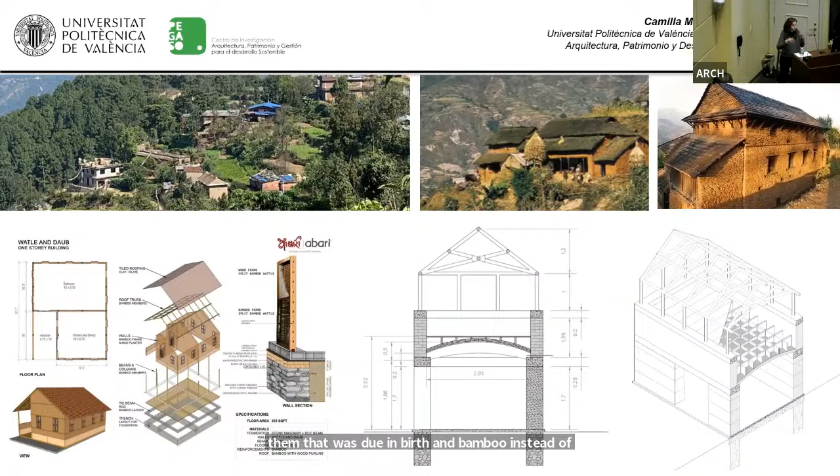We tried to build a prototype in collaboration with a foundation there related to earth architecture and bamboo. We tried to design a model of a new building, a very small house for them, using earth and bamboo instead of concrete and metal, but in a way that was resistant to earthquakes, of course.

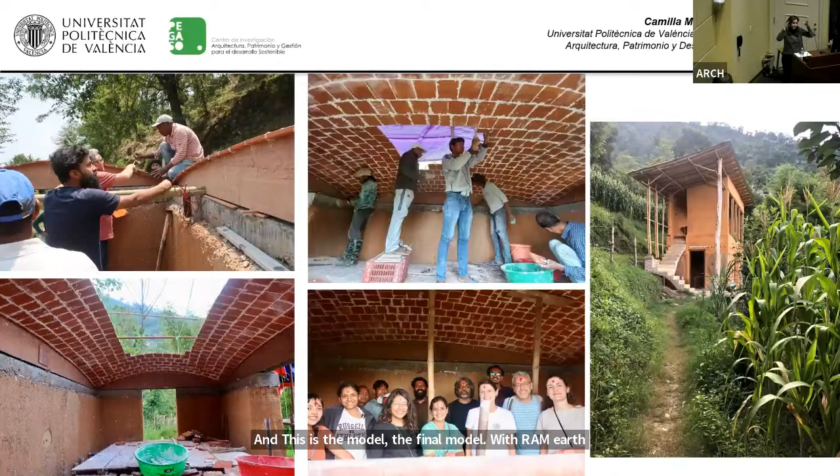This was also the workshop that we did there with workers, with students, with the people. This is the final model, with rammed earth, with tile vaults, and then the upper structure built with bamboo. These are more workshops also with architecture students, and with the children who will use this type of architecture.